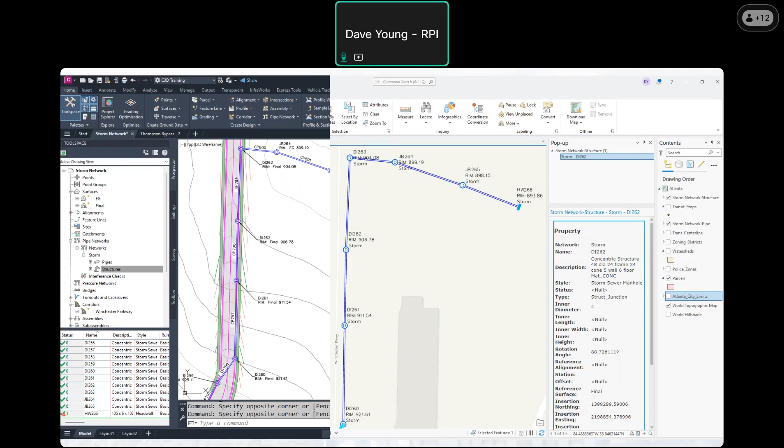The newer way is we go at this idea of a central data model, a shared data anyway. Okay, so that's kind of what we want to do, and we can do that pretty easily now. As of a couple of years ago, we can take even a Civil 3D drawing on the left-hand side of the screen here, and that data can be imported very quickly into ArcGIS Pro with just a drag and drop almost. And we see the same data in both places, and we don't have to export out and try to get all that metadata that goes with it, as we're talking about storm drains, manhole sizes, pipe sizes, and inverts and things like that. That can all just be brought over now. Now that's not anything new as of the past couple of weeks. It's been there for a while, but we'll take a look at some of that stuff.

And then there's finally the newer way to do this. This is a pretty recent development, and that is to use Autodesk Docs. So Autodesk Docs is a cloud-based service, and you may already own Autodesk Docs. If your engineering side has the AEC collection, they have a license for Autodesk Docs.

It's cloud-based. So this means that your external contractors and developers and consultants can upload a project into Autodesk Docs, and you can access it directly from ArcGIS Pro. You don't have to wait for it to come through and someone export out the data. It's almost simply just like a regular drawing file, a drag and drop. So that's the concept we're looking for here.

So let's see what we can do on making this actually happen in the software. So here I have an AutoCAD based drawing. I'm using Civil 3D for this. This is real simple, just building outlines, building footprints. Nothing but simple polygons, polylines in AutoCAD. I want to bring that data into ArcGIS Pro, and I'm running 3.5, I believe. And I know that those building outlines go somewhere down in about this area.

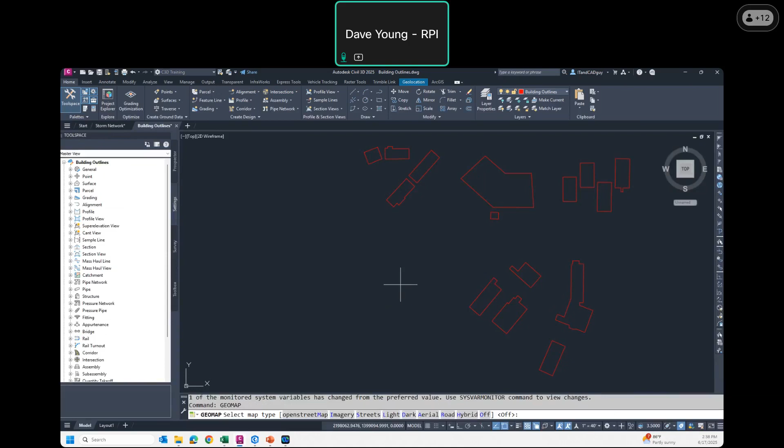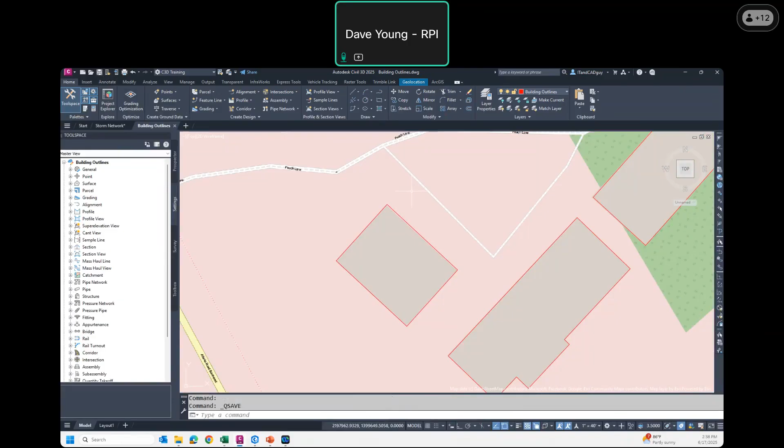So if we go back to our AutoCAD drawing and we add something to it, I think I can add, got a little building right here. I'm just going to draw a real quick little rectangle in AutoCAD. Something like that. And I'm going to save that file. Now this could be saved on my local hard drive, saved on my network, something like that. Okay. I am going to then go back to my ArcGIS Pro. Really all I have to do is kind of zoom in and it should appear there automatically. Okay, it's rereading that. I do have to do a little bit of scale change on that, but that building now shows up quickly.

Now that is just a simple AutoCAD polyline, so I don't get any metadata with it. I don't get addresses or occupancy numbers or anything like that. It's just real simple information. Okay. So nothing too fancy there. But the newest way is the partnership with Esri and Autodesk. They have gone ahead and made a connection to Autodesk Docs, which is that cloud-based service. I don't have to have the file local on my computer initially. Well, ultimately I do, but it makes a copy in the project folder for me.

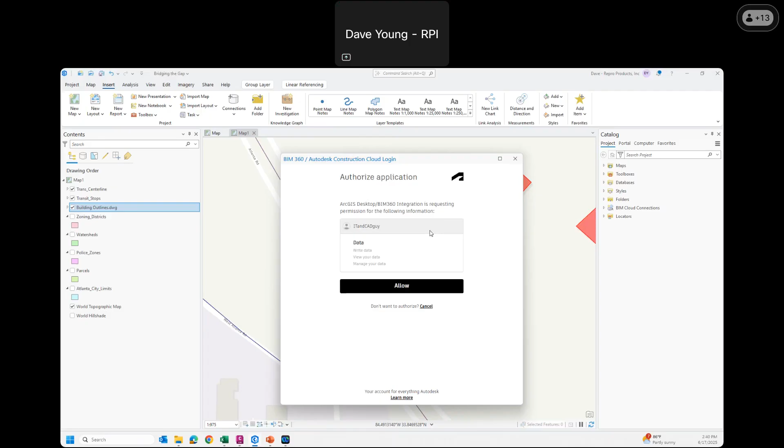Okay. So to do that, I'm going to go to the Insert tab in ArcGIS Pro, and I'm going to add a connection for a new BIM cloud connection. Click on that. We're going to give it a name. Call it Autodesk Docs. Now the connection type can only be the BIM 360, Autodesk Construction Cloud, or ACC. We hit OK. I've got to log into my Autodesk account. And this is a two-factor authentication code. Give me a second to enter my authorization code. Even though I check that box, it still asks me every time for some reason. So we're going to allow it to make that connection.

Now in my catalog, I have to have the catalog view up to find this. I can go find that BIM cloud connection. There's my Autodesk Docs. And Autodesk Docs, here's my site, may have multiple projects in it. Okay. I got a demo site out here. We'll see what's in there. We got some project files, and I've got a folder called GIS data. Now it is pulling the data from the cloud, so it takes a few seconds to do it. But I can see here I've got storm network. That is the same drawing I've got over here in Civil 3D.

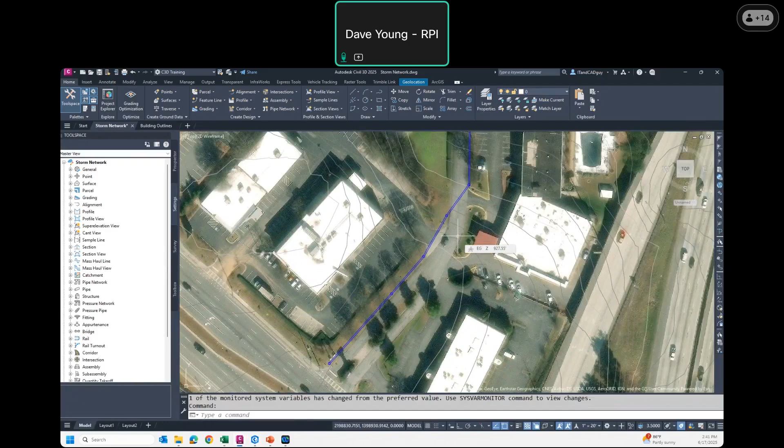Real simple, I've got a surface, some alignments. It's a typical project, but I want to bring this storm network into ArcGIS. So we'll jump back over to ArcGIS. I'm going to take my storm network and download that to my project folder.

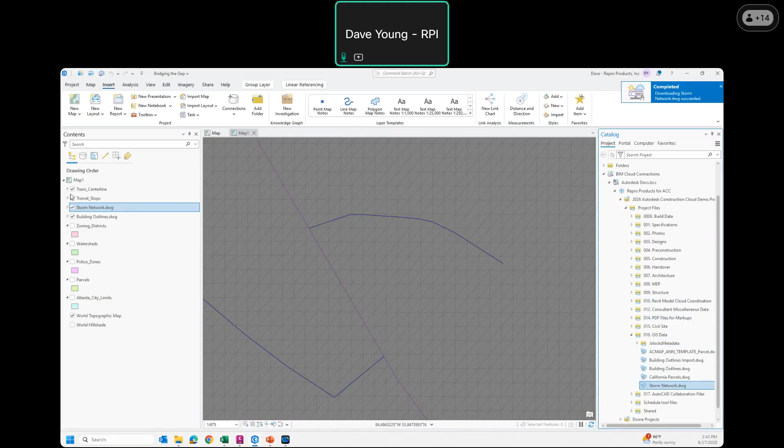This is pulling that file from the cloud. Now it's bringing over the entire drawing. Civil 3D drawings can be notoriously big, so I'm going to turn off a bunch of things in here I don't need to see.

I do want to see my pipes, and I do want to see my structures. Those are going to be over here. There they are, that quickly, out of the cloud. It doesn't take much to do that.

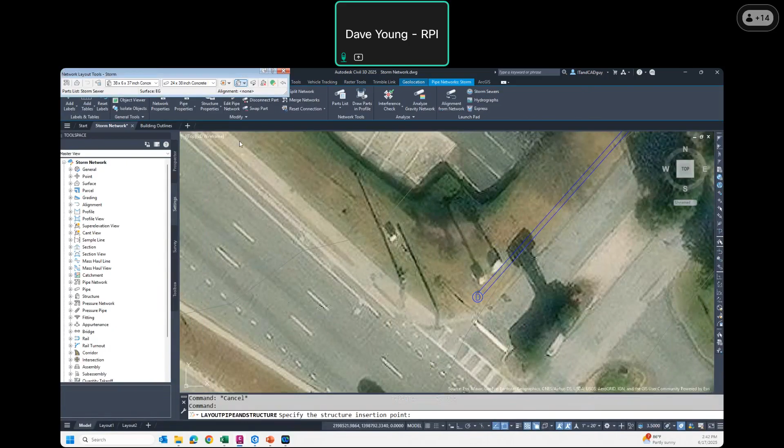The good thing about this is if something changes in here, let's add to this pipe network. So this could be my initial design, and then after it's built we go out and do an as-built survey, or the developer or contractor does, and they update this information. So now we're past the planning phase and into real conditions now.

So let's just drop in an 18-inch pipe on that. Now I'm not too worried about the design on this side of it, but I want to save that back to my construction cloud. Just hit the save button, because that's where I opened it from.

Now just to show you, this is definitely in the cloud. Let's go see if we can find that real quick. So there's my projects, there's my 2026 files. We'll see the exact same file structure show up here. There's my GIS data, and there somewhere my storm network DWG is still synchronizing.

I'm trying to stall here for just a second while it uploads. Okay, so it's uploaded now. We're on version 9.

Back over here in ArcGIS Pro, we can find that storm network, maybe check the properties, and it is version 9. Now the drawback is it's still pulling the old version. What's in the cloud is the current, version 9. What I've downloaded is version 8.

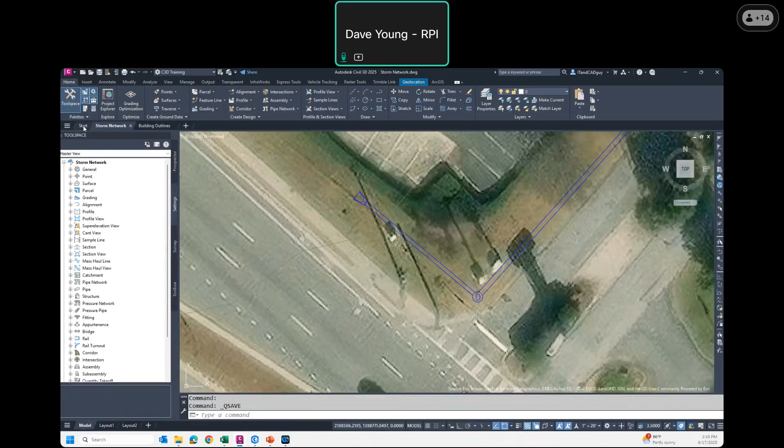Because of that cloud connection, back in ArcGIS, if I publish this as a web map to ArcGIS Online, I can use that back on the AutoCAD side. Now, I haven't updated my layer because it takes a few minutes to do that, which could be scripted to run every night, but we're just going to bring in what data I had as of yesterday.

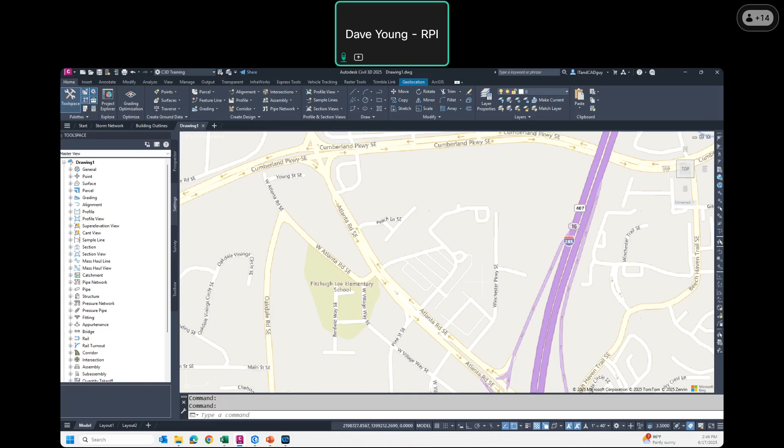I'm going to go over here to my Insert tab in AutoCAD. All Autodesk products have this - well, not all, but AutoCAD based, and I believe Revit even has the Autodesk connector for ArcGIS. So we can connect directly to that ArcGIS Online.

I want to kind of zoom in on the area I was working in a little bit. Right in here, I don't want to bring in everything. So I want to bring in what's in this area, right? So I'm going to just define an area, grab that right there. It's going to see what's available in that area.

I want to look at what I have under my content. I want to bring in my storm network - now this is yesterday's, not the one I just made, because it does take a few minutes to publish that. I'm going to bring this in as gravity pipes and structures for the pipe network. I can bring my building outlines in as AutoCAD polygons.

And let's bring in, just for the heck of it, our transportation center lines, our road center lines on this. Okay, I'm going to add that to my design project.

Let's take a look what we have in those layers. So we've got storm network, gravity pipes and structures, polygons... oop, I didn't mean feature lines. That's okay, no that's not it, I want to cancel that.

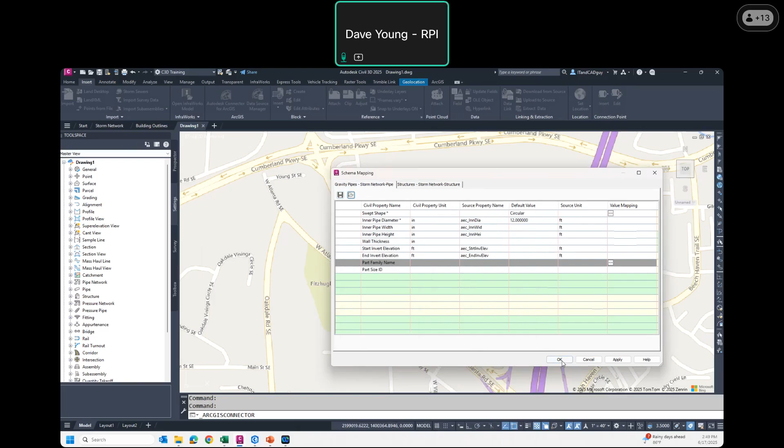We'll give it a second. And there we go, let's turn that map off.

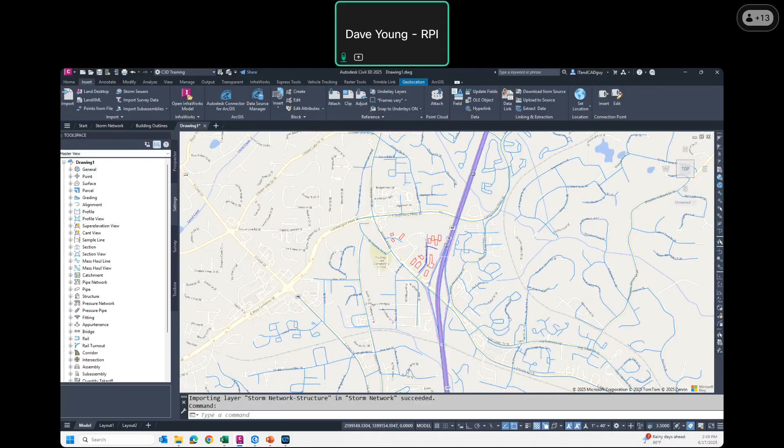So this data, I started off with nothing. I've got AutoCAD lines and polylines in here for my roads. And let's grab this one right here, maybe. Okay, that is a Civil 3D structure.

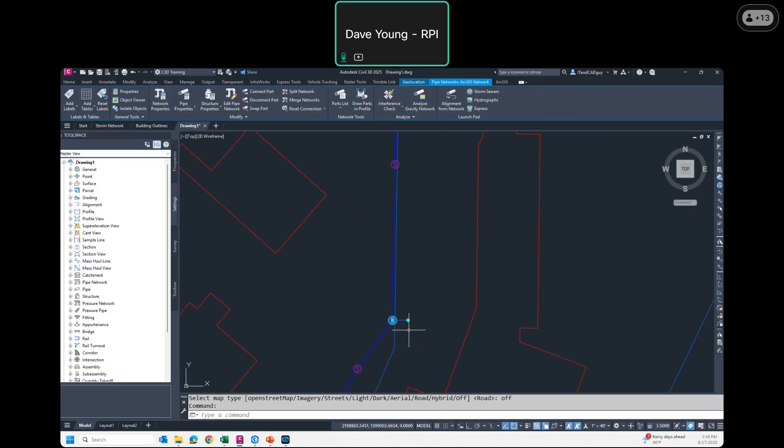Now let's grab a pipe, let's grab that short pipe. Pipe properties, and we can see that that pipe has a slope on it. Okay, it has inverts at the ends, things like that.

Look back in ArcGIS, find that same pipe, and we'll see the exact same information. So this data came out of Civil 3D to start with for the pipe network and the building outlines. It came into ArcGIS Pro, and then we exported it back out into Civil 3D.

We can make that round trip. Now, as far as I know, there's not a way to update a Civil 3D drawing from the GIS data, you just have to create a new one, but it is there. So that whole partnership between Autodesk and Esri is all about data sharing, speeding things up, not having to recreate the wheel every single time you want to add data to either side of that equation.

So, all right, that's all I've got. This is not a how-to presentation, and we're not doing training here.

I'm just letting you know that, hey, Autodesk Docs is new inside of ArcGIS Pro. The integration between Autodesk products and ArcGIS is relatively new. The fact that it automatically understands those Civil 3D objects, the pipe networks, the alignments for road center lines - it even understands Revit models. That is relatively new, and all it takes is just to drag that drawing or that Revit model into ArcGIS Pro, and it's there.